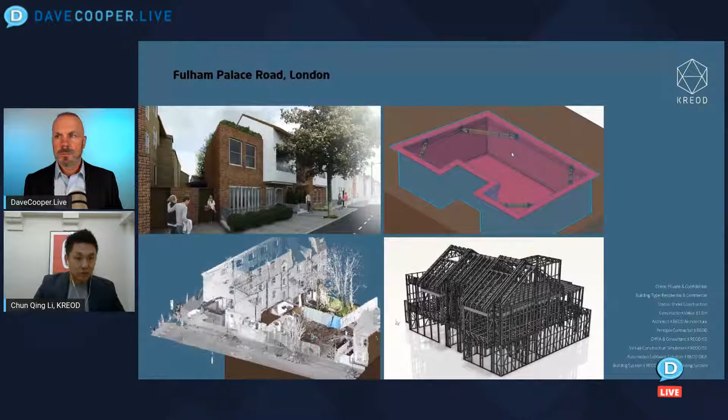So today I'd like to briefly talk about the issues we have in the AEC industries, and also the solution we have and what we build at the moment, and there are some case studies as well. So these are just examples of our built projects. And there's a residential project in Fulham in London. We're the principal contractor, and this one we were involved with my partner engineer, IDs Global. They specialize in light gauge steel frame.

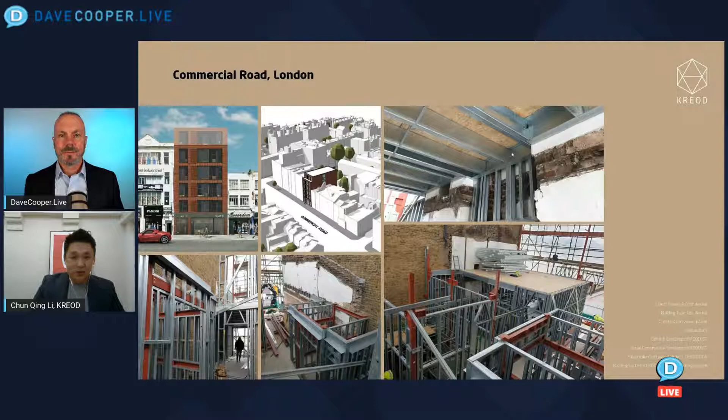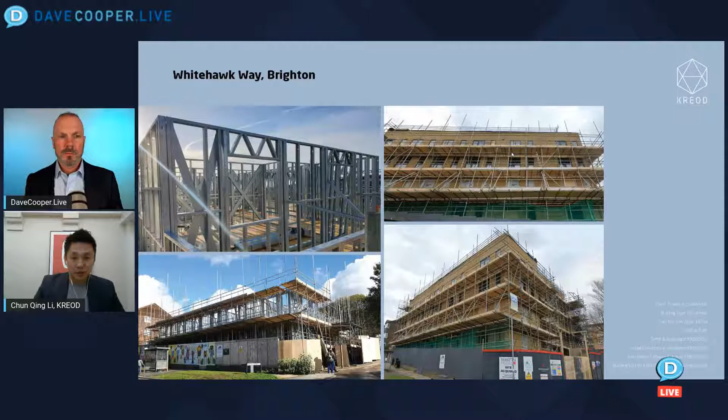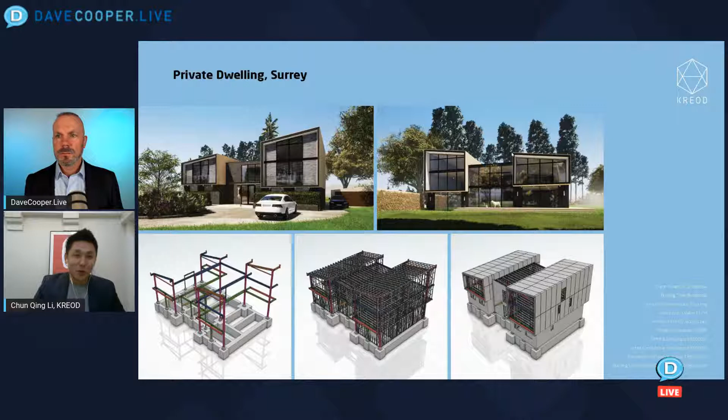So we were developing the software using this as a case study, and also involved in this project in Brighton, a housing apartment block, light gauge steel frame, and also with the architects for this project, from design, planning application, and DFMA. We've been appointed as principal contractor. The projects are currently on hold because of the material fluctuations. We'll wait until the price goes down a little bit.

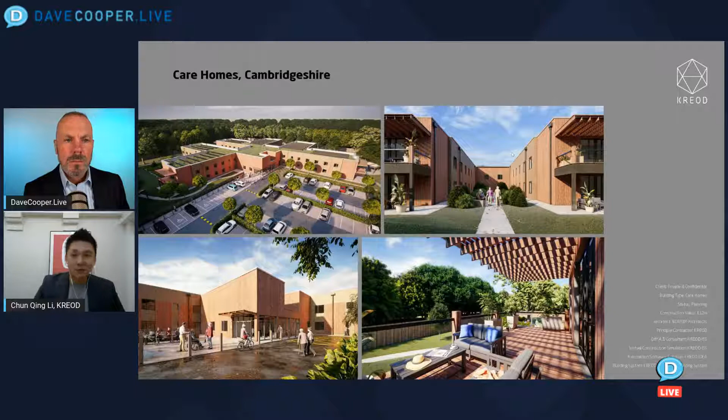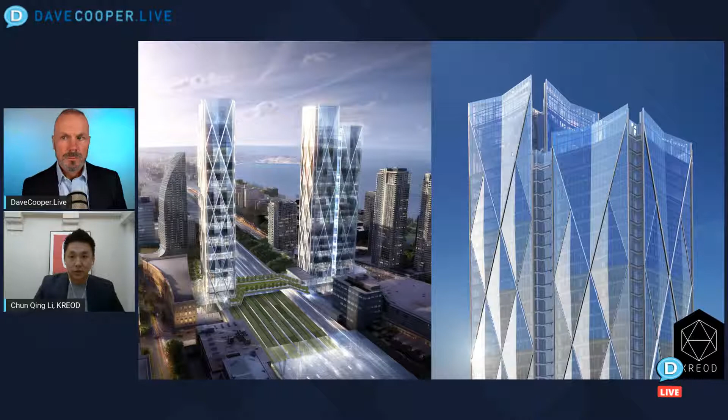And including our own developments, we're working on an airspace development in North London. And also the forthcoming project, care homes, using our technology and the building systems, KREOD Aeronautics Building Systems, aka CAPS. And also other projects, my background, very creative structural design, and also something more classic, and also facade engineering backgrounds, computational design, parametric design, helping other companies. It's one of the most internationally renowned architectural firms in the UK. And also been doing some really interesting projects in South City.

And this is the problem: our industry is absolutely failing badly. So we haven't had a significant, meaningful change for nearly a century, and we're still using the same workflow, which is unproductive and high risk. So according to the McKinsey research in 2017, our industry, the construction sector, is the second least digitized industry in the world, which is shocking.

And the problem we have is, the information we produce for most architectural engineering practices is still manually produced or reproduced, and requested by a chain of consultants. It's very labor intensive and risky, and the whole process is opaque. People work in a silo. So we have major problems here. But the thing is, even with the BIM solution, it still doesn't work very well. The procurement method is still isolated, and also drives the price upwards, leading to a race to the bottom in quality and performance.

And in the meantime, each consultant, they don't really talk to each other. Every single member is like an island, working on their own in a silo. So the technology hasn't really solved the problems, and I believe that we've been hijacked by software developers. As designers, we have to learn the software engineers' workflow, the mindset, which is sometimes very counterproductive, anti-creativity.

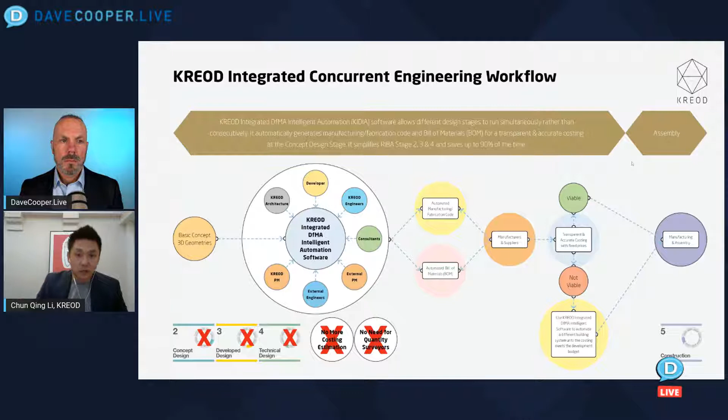And this is again, we're trying to simplify the process, and also I love quantity surveyors, but in this case, from the pre-sale stage, as soon as you develop the design to the delivery, we can just price a job without quantity surveyors. We talk to the manufacturers or suppliers directly, get quotes rather than estimation.

And I'd like to show you the first project we did, a KREOD Pavilion for the London Olympics in summer 2012. This was the very first project I did leveraging technology, computational design, digital fabrication, which could play a very important role in the AEC industries. When I showed the design concept to my colleagues, they said it's impossible.

And the challenge was not only the design issues, but more importantly, to raise the finance, and questions arise: who's the client? Who's going to pay for this? Where do you exhibit this? Who's going to build this? I couldn't answer all the questions, but I decided to go ahead. I had nothing to lose, really. So I started pitching this idea to companies.

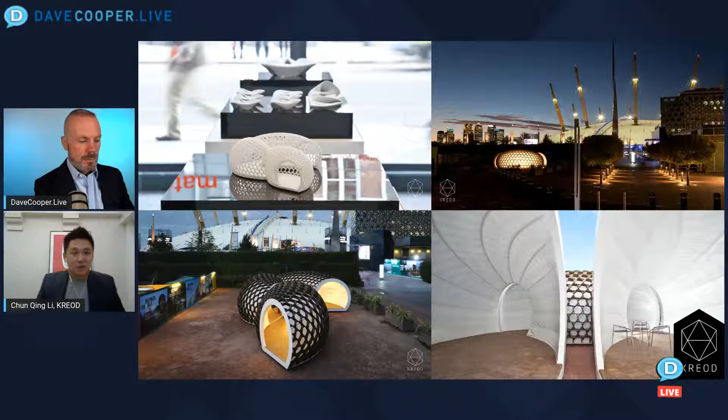And after thousands of rejections and failures, I managed to convince good companies, Hewlett-Packard, Bentley Systems, Kebony, and manufacturers like Tensile Fabric. And they kindly sponsored their products, materials, and services, and made this project successful. I'll just show you some videos.

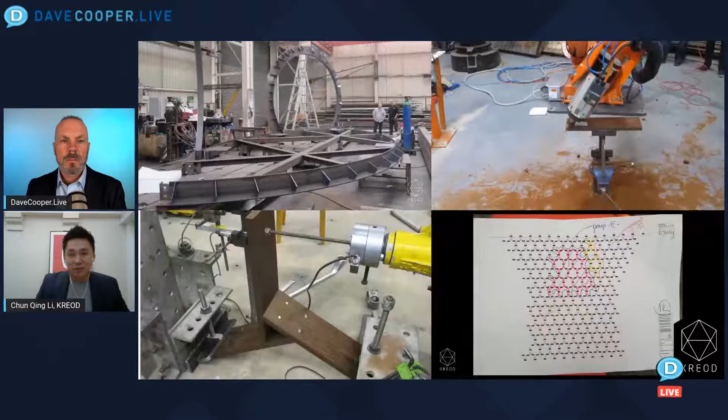This pavilion is 3 identical elements. Each pavilion consists of 997 unique pieces. If you put the wrong component in the wrong place, the next part won't fit. So this required aerospace accuracy. So I had to program what we call manufacturing modeling, a manufacturing-ready model.

And we detail-modeled every single component and turned this into G-code, so a robotic arm could understand it and manufacture each part. It was a pure R&D process. It was very, very exciting. I was very nervous as well because it's a high-risk project.

When I asked my QS friend how much does it cost, he said, look, the Olympic stadium behind you, the original budget was 385 million pounds, and the final cost was over 1 billion. So yours, it's about 1 million pounds plus contingency. It could be two, which is high risk, considering, Lee, you hadn't built anything in your life, and this is so complex, double curvature, etc. Good luck, young man.

So it worked out, right? It did, yeah. It was challenging, but it did work out actually. Luckily. And more importantly, I didn't just design a pavilion. Actually, I created a workflow, explored new working methods.

So simplifying using technology, programming, scripting, working with other very talented consultants, the geometry expert, Evolute. These guys are mathematicians. They just program things. It's genius. And also my structural engineer, Ramboll, as well. And we just made this thing work, and the only paper we had was this one. You can see it's an assembly diagram.

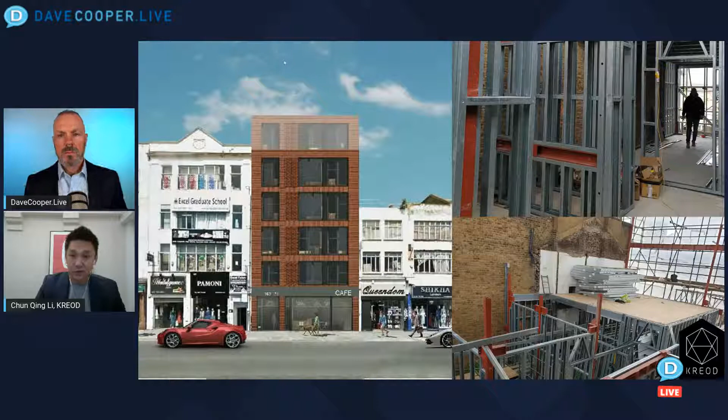And the next one is when I was working with IDs Global. My structural engineer, Nigel, has been very, very helpful supporting us, giving the opportunity to get involved. This project is an existing terraced commercial unit, turned into a flat and coffee shop. It's hybrid structures, steel frame structure, hot-rolled and light gauge steel frame systems. And the next one, we got involved further and worked in the background.

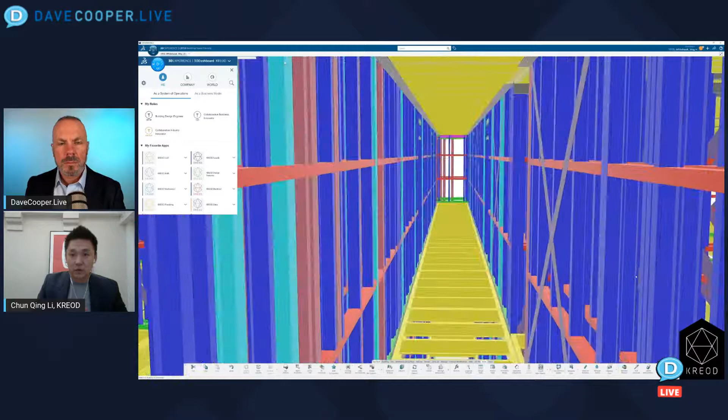Testing out technology as well at the same time. And so what we've done is we developed this. I was working with Nick, CEO of Howick. He was very supportive and helpful and gave us all the technical information. So we developed the system based on the engineering rules and creating templates. So the principle is, just a reference surface like that, and it creates a wireframe.

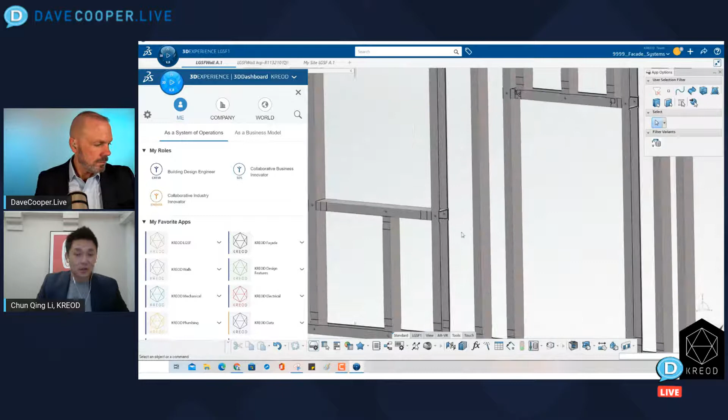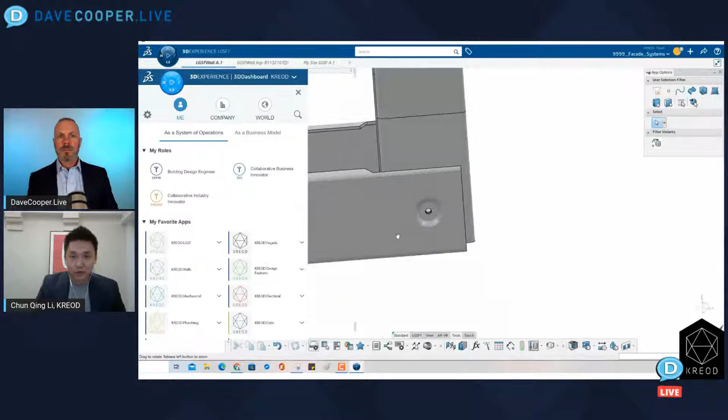So we pass it to the structural engineer, they can carry out structural analysis, say this double stud here or triple stud there. So it automates and generates a fully detailed 3D model. In the background, it creates manufacturing code and also shop drawings. So this is the range of tools or apps we have developed on the Dassault Systèmes 3DEXPERIENCE platform, which is very, very powerful.

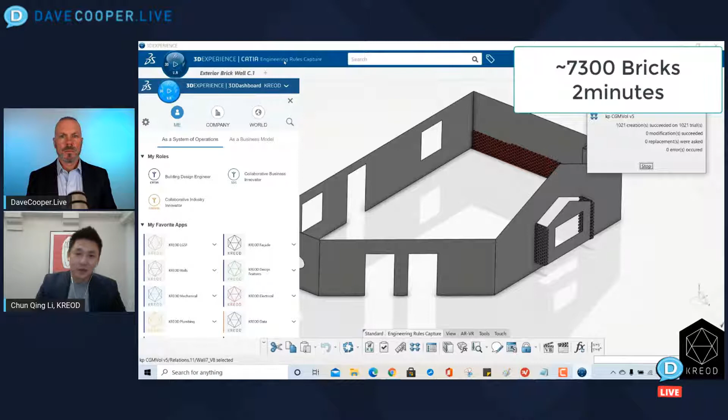So from the light gauge steel frame, hot rolled steel frame, to facades, and next challenge we're going to crack the MEP side, which is another challenge. We're working on that as well with engineers from aerospace and automotive industries. Very talented team we have. And also, as you can see, from very concept design stage, just some reference surfaces, it just automates the brickwork, for example, or brick slip, the full cladding systems.

And how accurate is that? It is very accurate actually. The structural opening has got the intelligence. Say the brickwork doesn't match the structural opening exactly. Sometimes the structural opening is here. You want to cut the brick by 11.798 millimeters? So you would do a full size brick or half.

So it will adjust itself. You have to change the design accordingly rather than trying to match the architect's design intent. That's the structural opening we want it to be, but it doesn't look very nice in the real world. Right. Yeah. So we eliminate the problems.

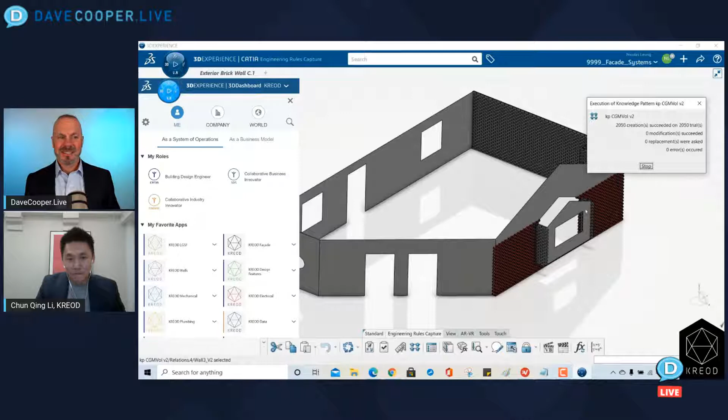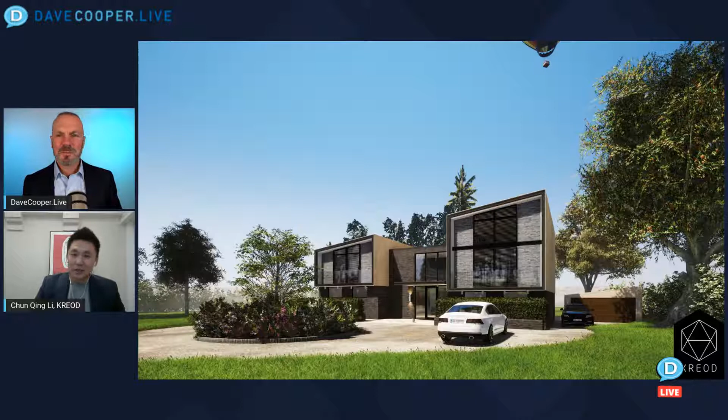And also this is a case study. We were the architects for this project in Surrey. The client hired two architects before us, both from Grand Designs, very famous. Unfortunately, they couldn't get planning permission because the site is on the green belt, also the conservation area. So we had to demonstrate the quality design, sustainability, the methods of construction, etc. We did get planning, and we also did the detailed design stage as well.

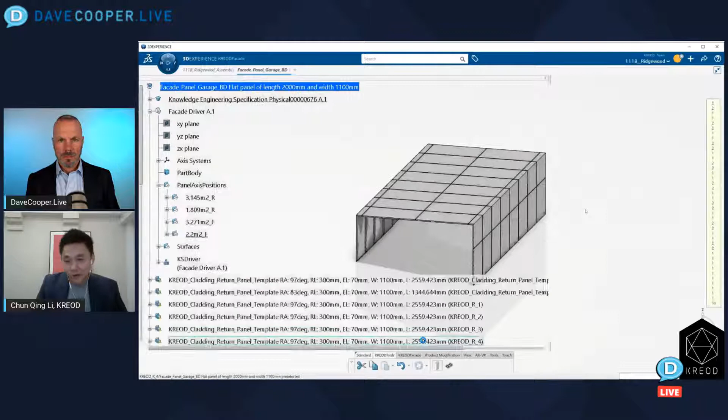So this is the tool we have developed. We use the garage as a test at the moment. So the Kingspan facade. As you can see, there's reference surfaces. All you have to do is click on the panel. My 5-year-old kid can do that. My receptionist can do that. You click and it's done without knowing what just happened. So the panel's done. And the next click, it will generate all the cladding rails.

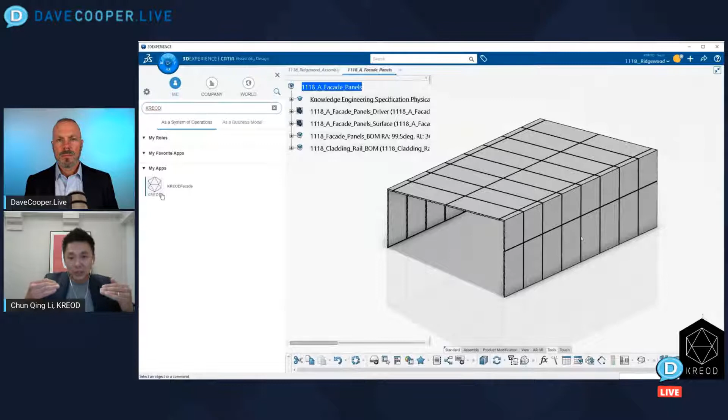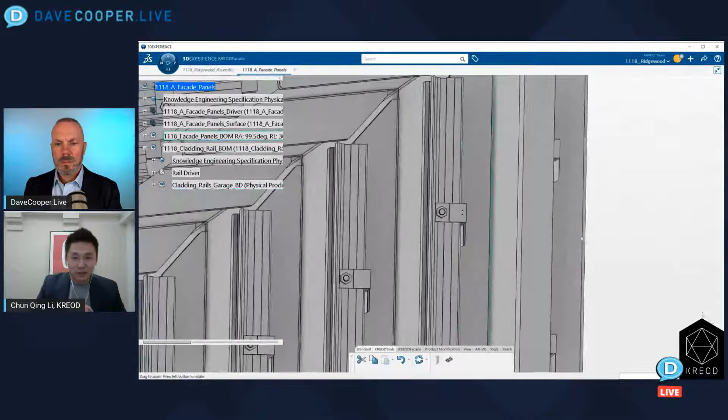So for the cladding panel, it automates CNC code and also shop drawings, so you can pass it to the manufacturer or even the steel fabricator. This system we use is Kingspan because in the middle of the pandemic, we were considering doing our own system, but we couldn't do any testing. So Kingspan was a safe approach. So it automates everything. Two simple clicks, the job is done. And this is the entire facade system of the project.

The whole building is parametric, light gauge steel frame, the cladding, insulation, and also we developed a tool for the internal boarding, plasterboard, everything. So for this job, the client made 12 changes. If you work in a traditional way, architects only do the design intent. They just change the building form.

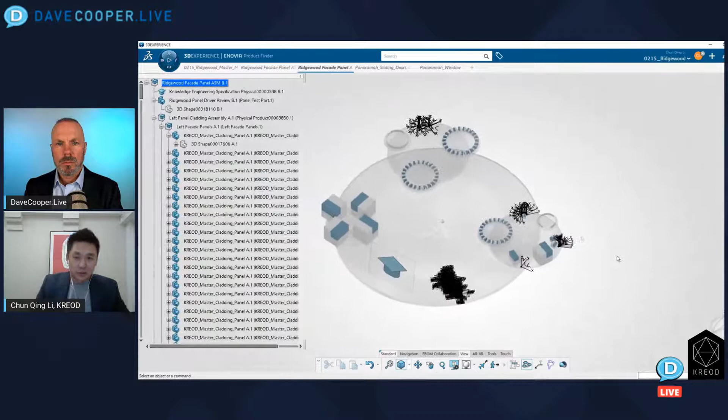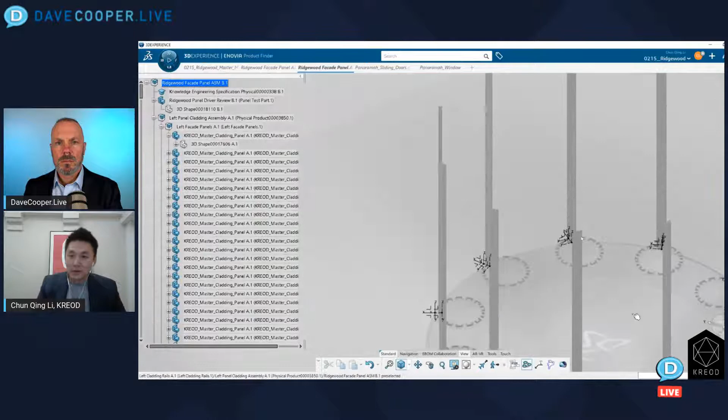If you want to get into the detail stage, down to bolts and nuts, you need to have a principal contractor on board, and you need to get their own subcontractor, facade engineer and the manufacturer. If you make changes once or twice, you can get away with it. But if you change 12 times, come on, man, we need to charge you more money for this. So financially, it's not viable. For many clients, we face the same problem.

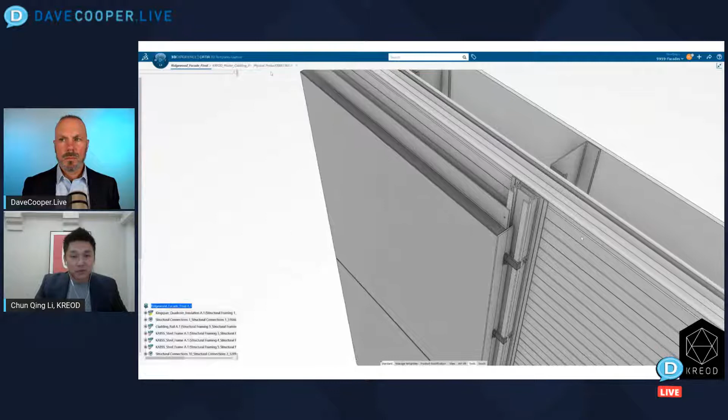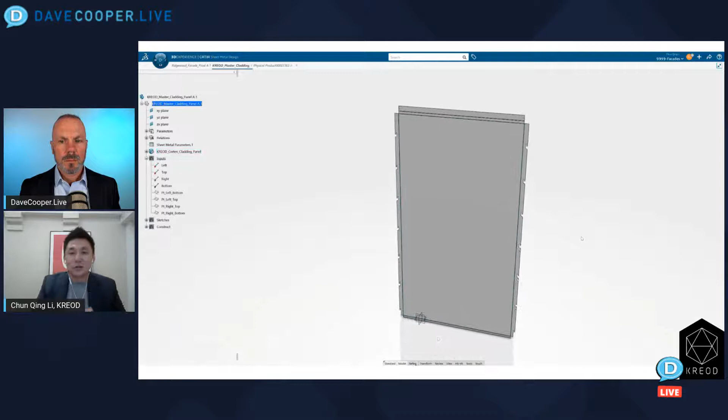If you don't have the intelligence, you have to redesign the whole thing. The entire design program pushes back, and it costs you more money as well. For this job, we changed 12 times. It was viable because just a few clicks and the job is done. The client said, we don't have a budget for underfloor heating, and then, now we have, let's do underfloor heating. Can you make the roof pitch slightly steeper? Things like that. So these are fully parametric templates with constraints as well, to understand the maximum and minimum size of each panel.

And hot rolled steel, light gauge steel frame to the cladding system, automated. So I was very pleased with this. It's just fast and efficient. So what we're creating here is not just accuracy, efficiency, but certainty, financial certainty.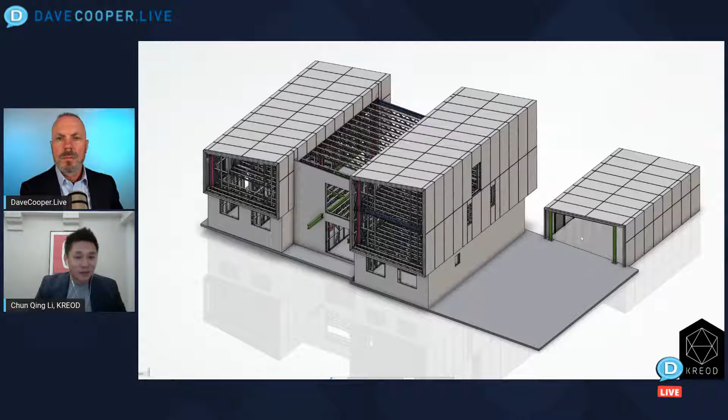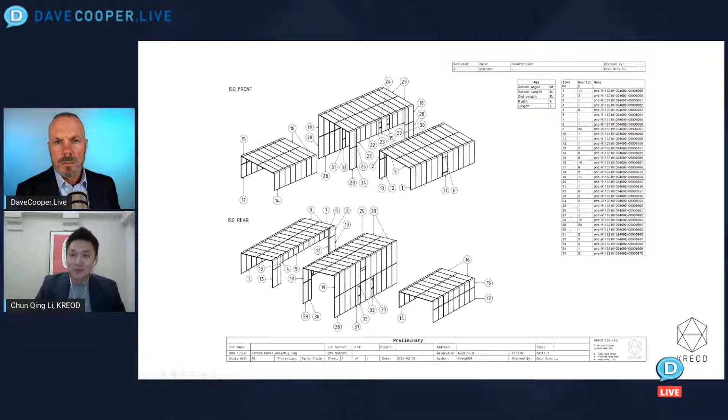That's very, very important for anyone really, especially the developers or the clients. And also the assembly drawings are automated. It tells you how many types of panels and the quantity per type, and also the shop drawings. You can pass it to the steel fabricator or manufacturer.

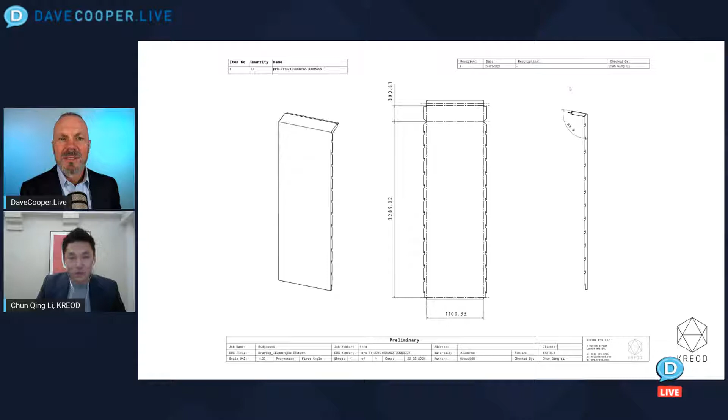I did a test. I gave a design intent, just elevations, to the facades company, and later on I issued the shop drawings and manufacturing code. It turns out it's £24,000 cheaper. I did raise the question, why was it more expensive? They said, well, I had to price something higher to price the risk. We only have a design intent with some dimensions.

But once you get into this level of detail, this is it. They give you a proper quotation. It tells all the bolts and nuts. For sure. I was quite pleased with the results as well.

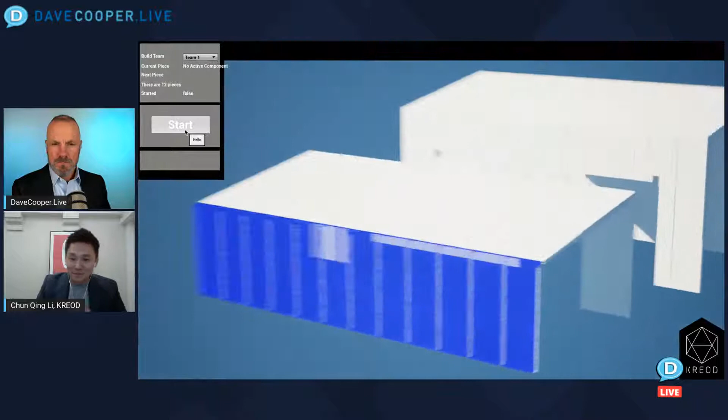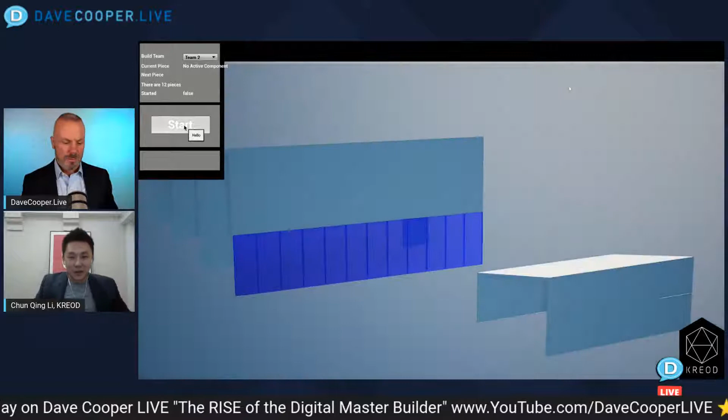So we also developed a beta tool, an assembly sequencer, just to try to simplify the process. So we've got a foreman on site, and not very skilled workers. They just need to put the right component in the right place. Once it's done, it's validated by the site engineer or manager. You can click Lee and Dave: you assembled these 5 panels today, for example. So it's quality control.

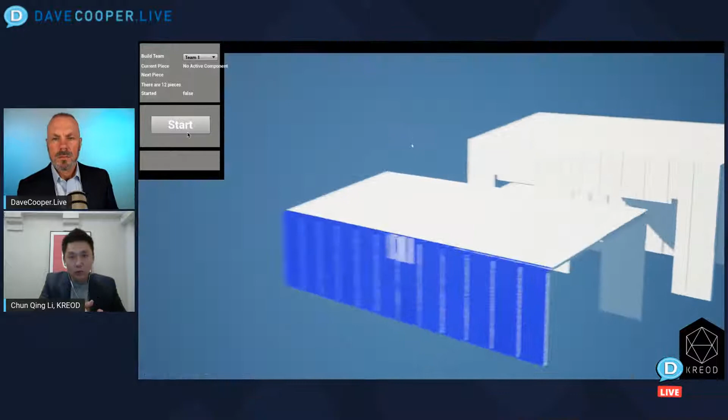And another thing we're trying to introduce: from this project on, we're going to simulate the construction process. So we can break down how many components can be assembled in reasonable weather, not heavy rains, etc. So we can work out how long it takes, and a transparent labor costing really.

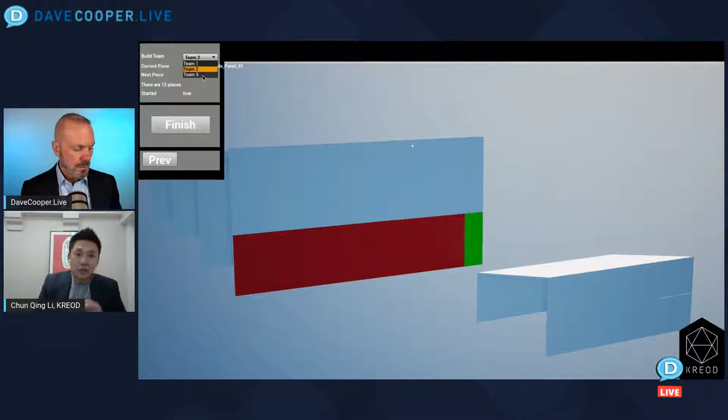And more importantly, for future projects, when we simulate that, we can break down the quantity, the portion each team can deliver every day. If they can build faster, we'll pay them more. So this is encouraging people to work faster, work harder. So ultimately, our budget isn't affected.

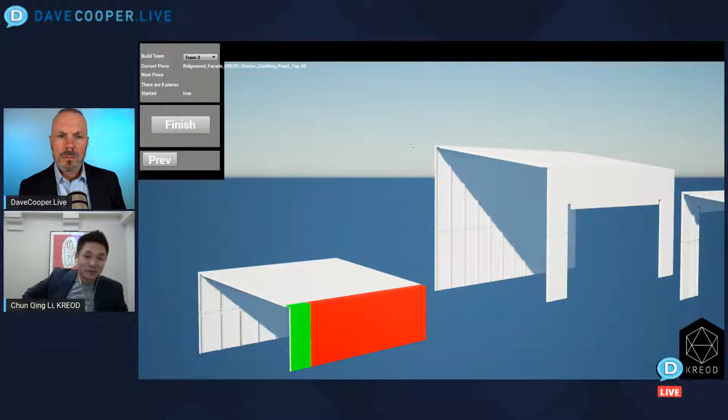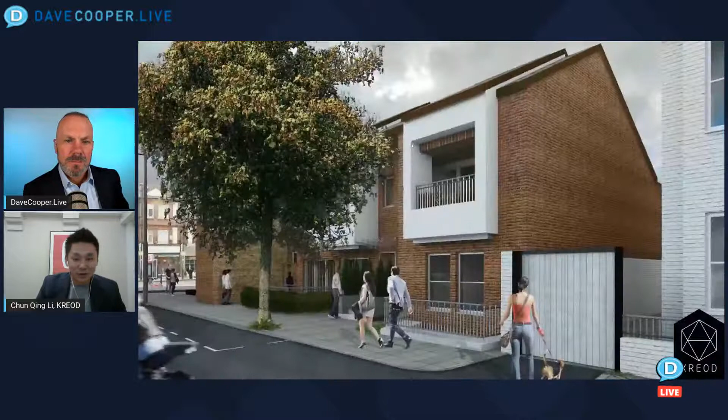There's a pot of say £800,000 to assemble this building. It doesn't affect the cost. If they finish faster, everybody wins. Sure. So that's a workflow that changes the mindset. Otherwise, people just take their time, slowly. Absolutely. They don't get more money if they work fast. So we encourage them.

So this is the project. My investor bought this plot of land with planning permission granted, and we're the principal designer, the project manager, and also the principal contractor. And we used a Dassault Systèmes, we did a point cloud, we scanned everything. The site is very tight.

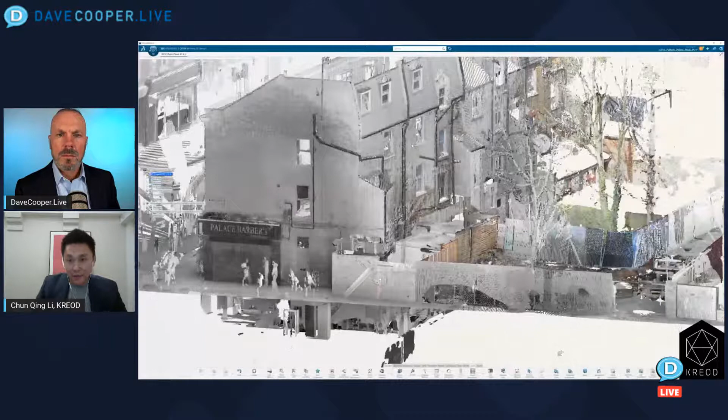I just didn't know what's happening next door. As you can see the basement here. I had no clue. Couldn't find any information. They didn't have planning permission or building regulations. Just a grey area. So we did a 3D scan.

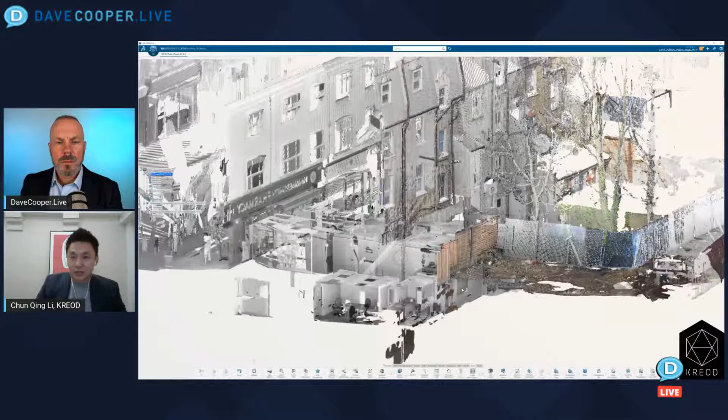We checked. It turns out the basement's internal wall in the corner is only 107 millimeters from the boundary line. So assuming the retaining wall is 400 mil, the retaining wall is on our side. And our initial design had a ground beam and mini piles along this boundary line. If we did it, we'd be in huge trouble. We'd face massive claims from the 5 neighbors next door. Luckily, because we could see what's going on, we changed the design accordingly before construction started.

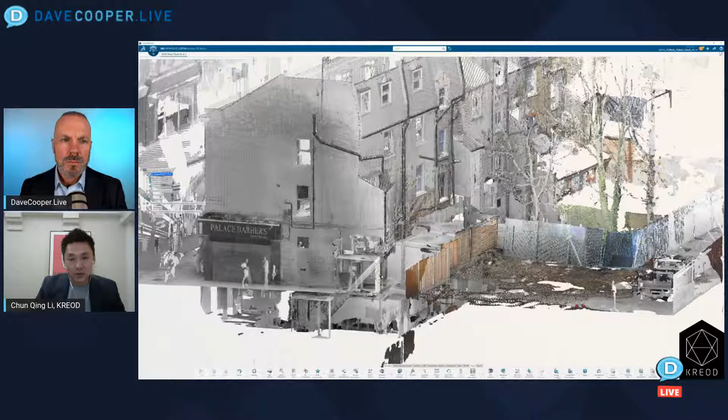What did you use to do the 3D scan? Any 3D scanner, Faro Technologies. They've been very helpful, they do the 3D scan and turn the 3D points into mesh. This is very interesting. For the entire project, we had to do some 2D drawings for the basement subcontractor, setting out drawings, but for us, we don't need any 2D drawings at all.

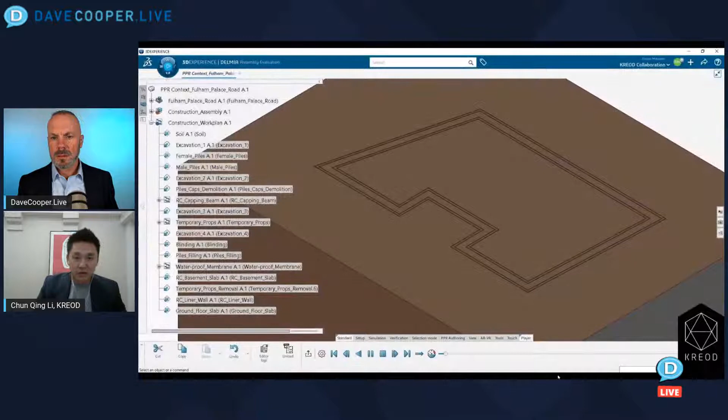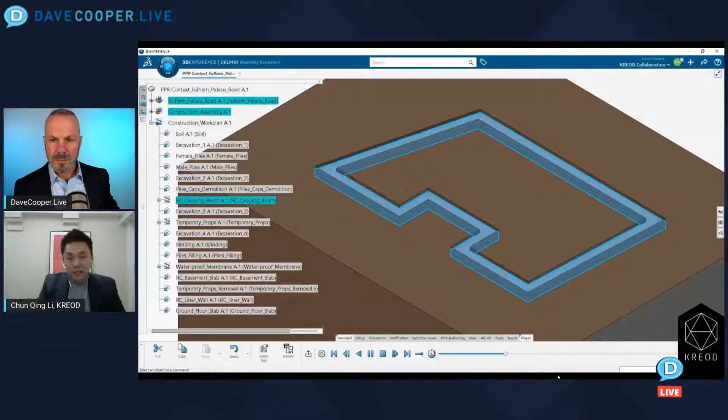So we also simulated assembly sequencing. As you know, my background is not as a building contractor. I work with my team. We simulate the process based on the program and elements. So if there are any changes, we can see the impact months down the line. It's all about certainty, and risk management as well, which is very important.

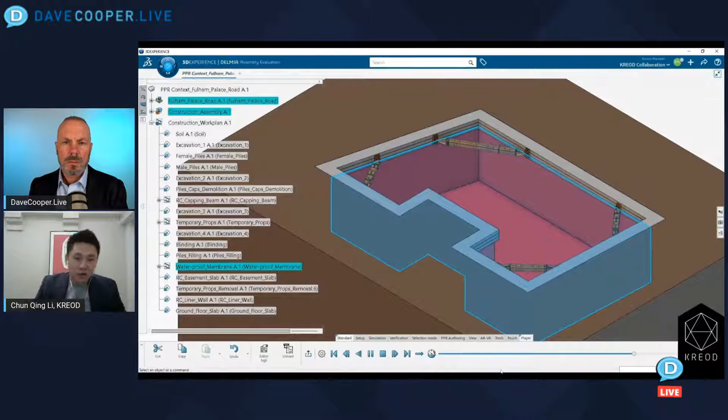So you just simulate everything, it tells you when to do that. We can do something even more detailed, the operation, how the crane and the lorry come in and turn, the drop, the props, everything. Now, does that also give you the cut and fill for the land around the building as well?

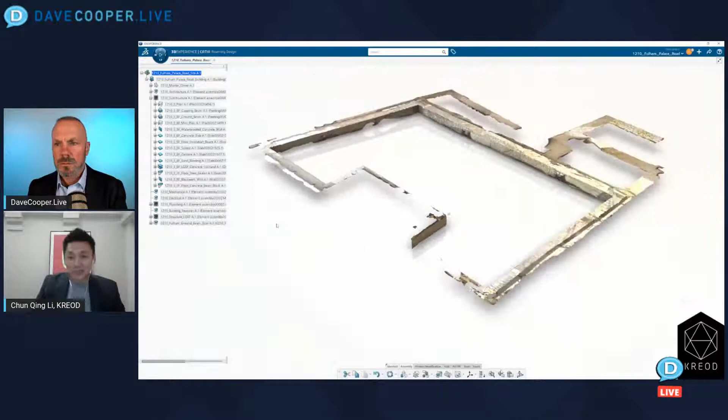Yeah, everything. You can go as far as you can. And obviously the contractors say the 10 millimeter tolerance. So we got Faro Technologies. They came out, they did a scan and did point clouds, and they brought in the 3D mesh. I just did a compare, because it's quite important.

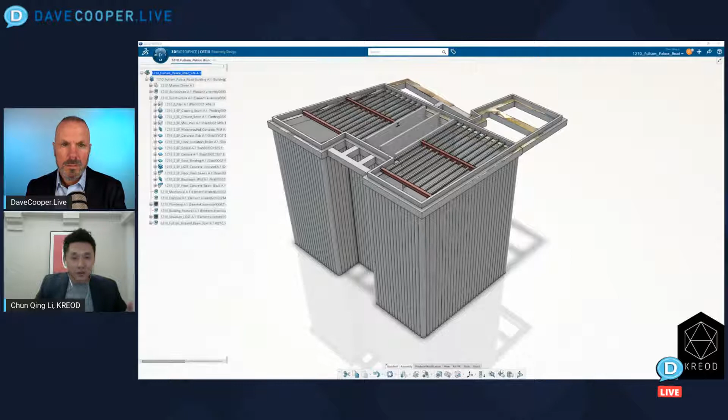We do the prefab, the offsite construction. The ground beam is very important. It needs to be as accurate as possible. But how do you see that? I need to see it. So I bring the 3D scan and check it. If it doesn't fit, obviously it's too late, it's already been built. Instead of pointing fingers, we just fix it.

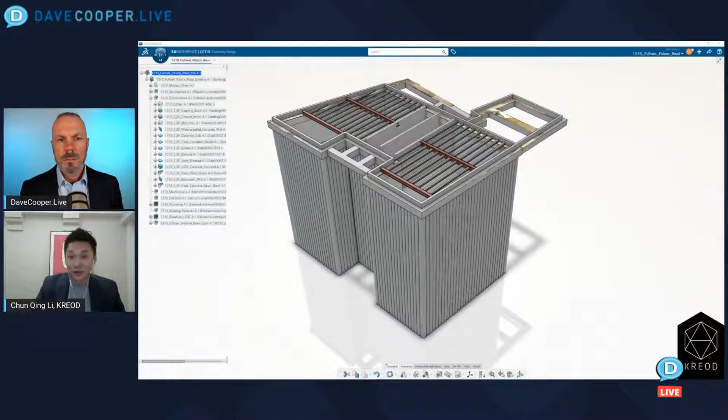We can see the difference and then alter it accordingly, rather than the next contractor comes in and says, "Oh, the groundwork's not ready," and then they start claiming it's not their fault. Obviously, you've got 5 guys on site, a £3,000 a day claim. You don't want that. So yeah, we just completed the basement.

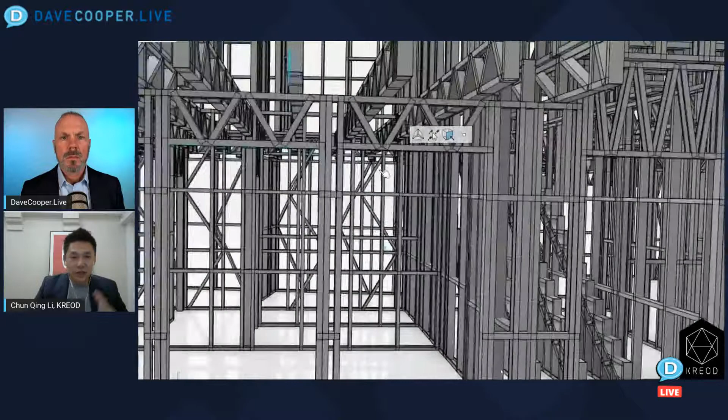I'm very excited, and we'll move on to the next phase, the main building, which is hot rolled and light gauge steel frame. We're working on that. I'm working with IDs Global, my structural engineer. So yeah, that was the initial design, and we're making some changes as well.

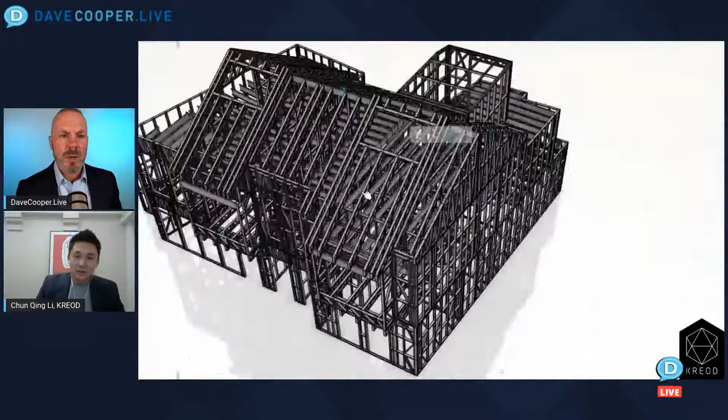Yeah. While you're talking about hot steel, we just had Tata on yesterday, right? Or no, Monday. I'm sorry, Monday. I'm losing track. So for people out there, they're looking to partner with general contractors and designers to come up with better ways of doing their steel as well, which is super cool stuff. Absolutely. And they're one of the largest in the world. Yeah, it is a way forward, actually.

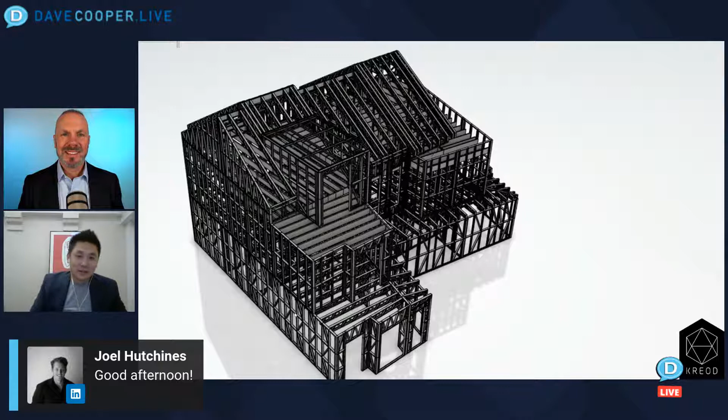People think steelwork has a high carbon footprint to produce. But as you can see, these panels we produce are standard heights. So what we're encouraging is, instead of recycling, we don't recycle. Our slogan is don't recycle, reuse. And when we produce the KREOD homes, it's exactly the same principle. Standard modular parts, panels. You can just create anything you like.